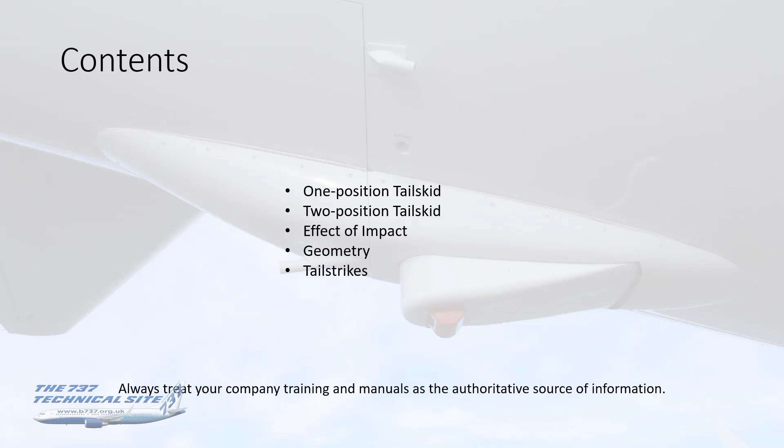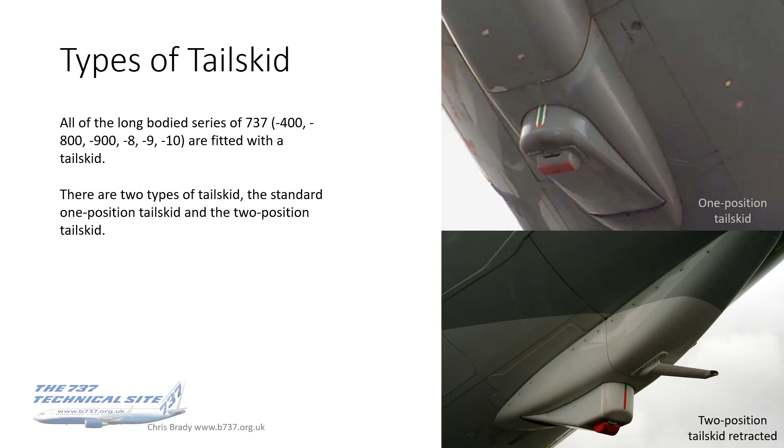Now, when on stand, they both look very similar. It's actually fairly difficult to tell them apart because almost all the time a two position tail skid aircraft is on the ground, the tail skid is actually retracted. The way to identify them is that on the one position tail skid, the skirt is pretty much straight, whereas you can see on the lower photo the skirt has got a distinct angle about halfway through it,

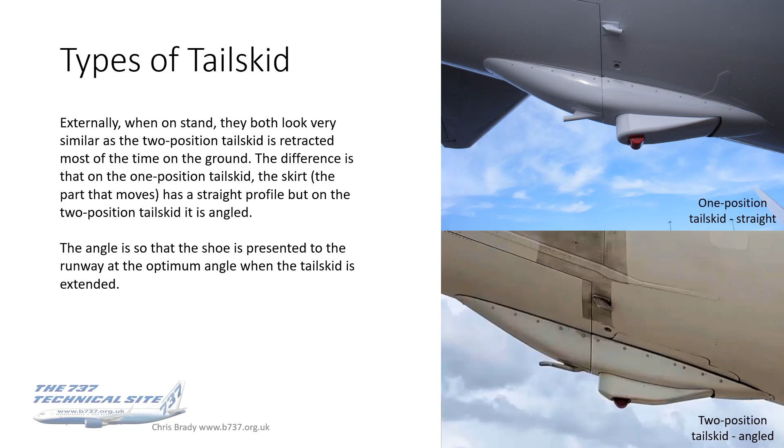and that's so that when the shoe is presented to the runway, it will be presented at the optimum angle when the tail skid is extended. Otherwise, you can see from the geometry it may just hit that angle first rather than the shoe, which is what it needs to do. This will become more apparent later when I show you photos of that two position tail skid in the extended position. But if you're on a walk around wondering which one you've got, that's one of the ways to tell.

So let's have a look at that one position tail skid in a little more detail. So this is standard on the 400, 800, and the old 900, the MAX 8 and the MAX 8 200. And what it does, it protects the fuselage from tail strike damage during over rotation on takeoff. And that's important to remember, that it only protects the aircraft on takeoff.

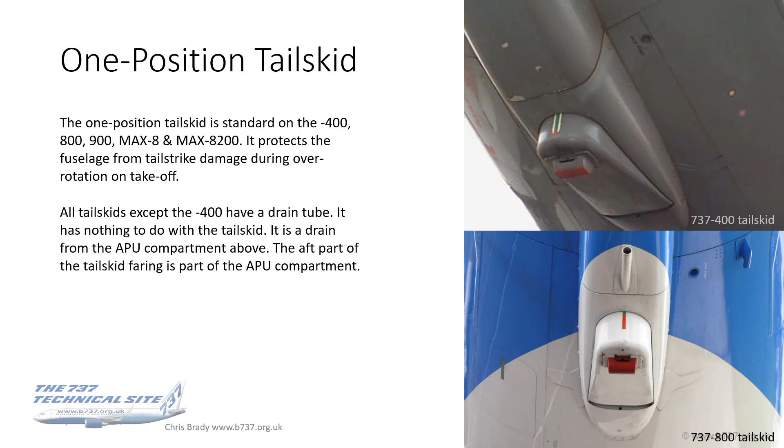All tail skids except the 400 have got a drain tube, which you can see just aft of the skirt there on the lower photo. That drain tube has actually got nothing whatsoever to do with the tail skid. It's a drain tube from the APU compartment above it. The aft part of the tail skid fairing is actually part of the APU compartment. You can see the line there going across sort of halfway on the tail skid, about an inch or so behind the skirt and the decal. That's because the tail skid fairing isn't one piece. It separates because the back half is part of the APU compartment.

And the simple reason why the drain tube is long is just to keep the fluids off the aircraft skin. If it was just a hole or a short tube, then it would make a mess all over the back of the fuselage. But being several inches long, it's hopefully taken away by the airflow. So that's all that is. No great mystery there.

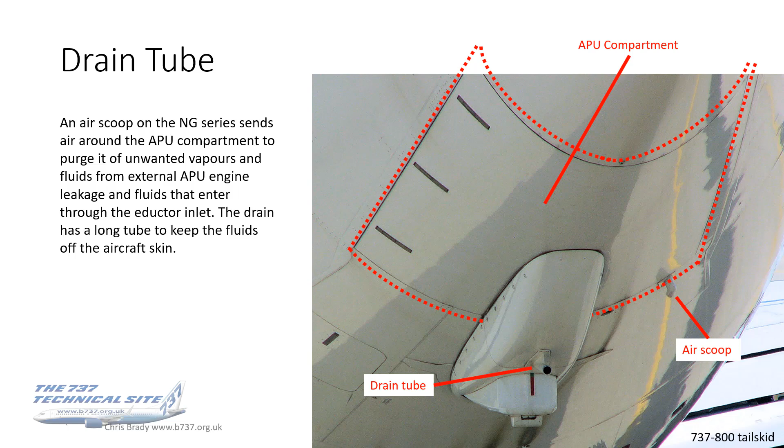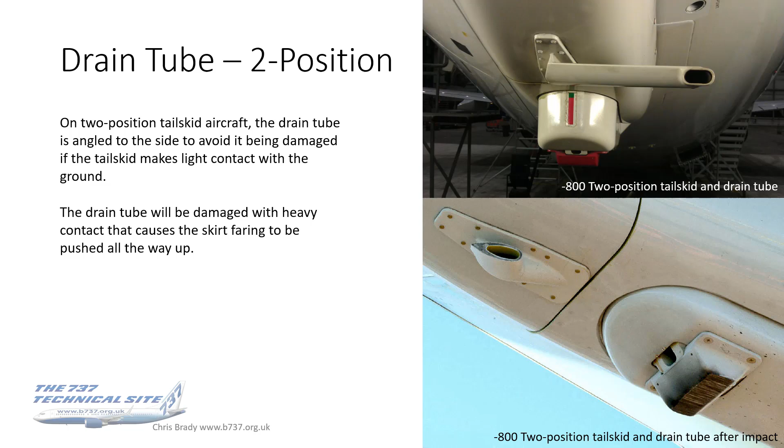You can see on the lower photo that after heavy impact it will be worn away. Well, there you go. The drain tube is kind of designed with that in mind. I wouldn't quite say it was sacrificial, but it's certainly made from a material that will erode on contact with the runway. So that's the drain tube pretty much covered. Oh no, not quite. There we go.

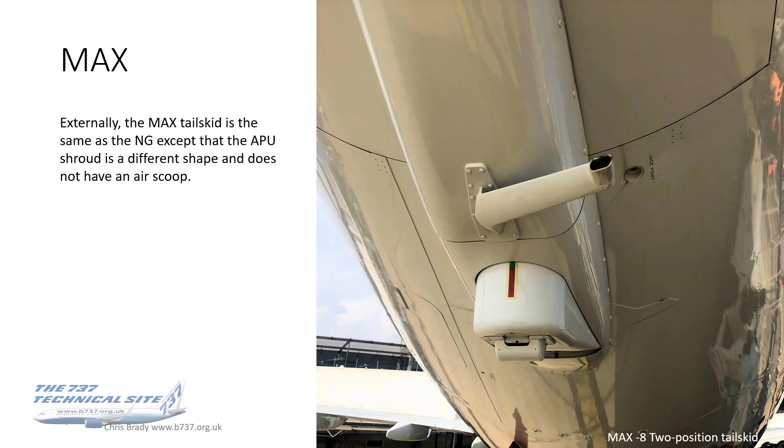On the Max, it's the same as on the NG, with the exception that the APU shroud, because it's a different shape, because of the different tail section on the Max, doesn't actually have an air scoop. It doesn't have an eductor hole, if you recall, on the APU. For more details of that, go see my APU video. But it doesn't have the air scoop, but the drain tube is the same.

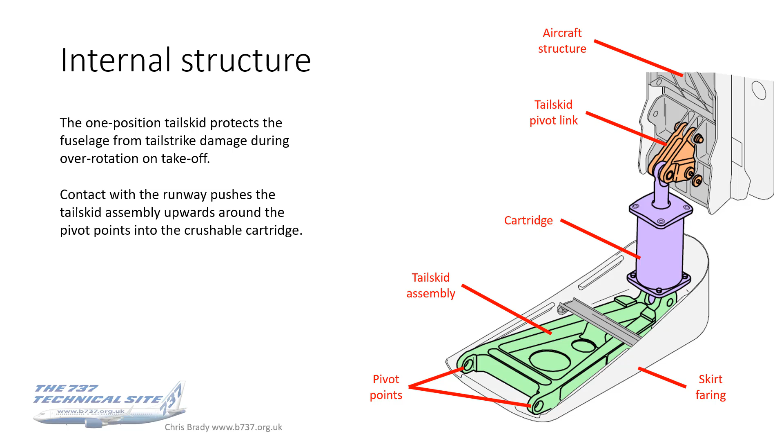And then, if the contact was a little harder, it would push that tail skid assembly upwards around the pivot points, because it's pivoted at the front there, into the crushable cartridge, which is shown there in purple. The cartridge is attached to a pivot link, shown in sort of orange, which is in turn attached to the aircraft structure. So that's what it looks like inside, and we can compare and contrast that with the 2-position tail skid.

So these photos are showing the 2-position tail skid retracted on the top and extended, as you can see, on the bottom. So it doesn't extend very far. It's actually only 5 inches, but it's considered to be enough. So the 2-position tail skid, as you're probably aware if you saw my previous video on the SFP, was brought in for the lower approach speeds of the SFP.

So it came in 2006, and it was considered to be so successful, it's now standard on the 900 ER. In fact, it was one of the factors that made the 900 ER, the Max 9 and the Max 10. It's also, as I said, an SFP option for the 800 and the Max 8.

The main operational difference between the 1-position and 2-position tail skids is that the 2-position tail skid protects the fuselage from tail strike damage both during takeoff and landing. That's the key to it. This will protect the aircraft to an extent for landing, which the old 1-position tail skid never did.

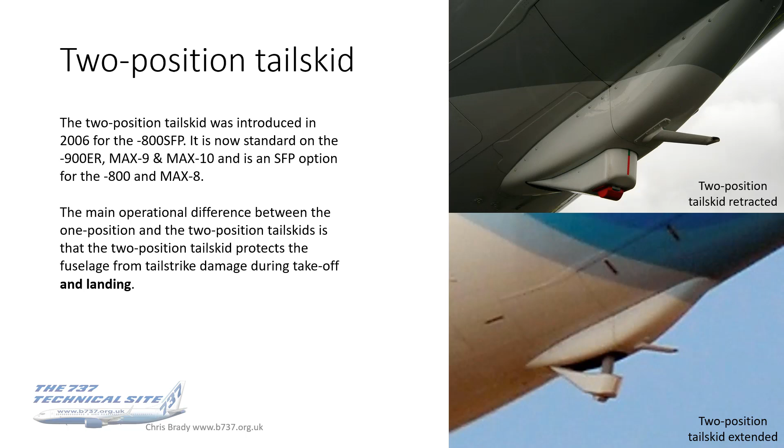So extension criteria: it will extend 5 inches, or 12.7 centimeters in metric. It extends just before landing. It actually comes down when the gear comes down. So this allows greater angles of attack to be safely flown. That enables low VREFs to be scheduled, and hence the landing distance reduced.

So there's no button or switch or anything in the flight deck other than the gear lever. That's what triggers it. So it will extend when the gear is extended in flight, i.e. for landing only. So this does not extend for takeoff. Okay, it only extends for landing. It will retract when the aircraft is on the ground for more than 5 seconds, which is why you never see it extended on stand.

Or if the landing gear lever is not down. So as it comes down, when the gear comes down, what they really mean by this is if you've gone around. So for the go-around case, the tail skid retracts.

Now you may think there's a bit of unnecessary over-engineering with having that. My theory for why this happens is because there would be a drag penalty with this, particularly perhaps in the engine-out scenario, and that would need to be recertified and what have you, and new graphs drawn up. Whereas I guess Boeing thought, well, if we can make it extend, we can make it retract again. Let's have it retracted for go-arounds. Which, as far as we're concerned in the front, we like that. Anything which gives us better performance, we're all in favour of.

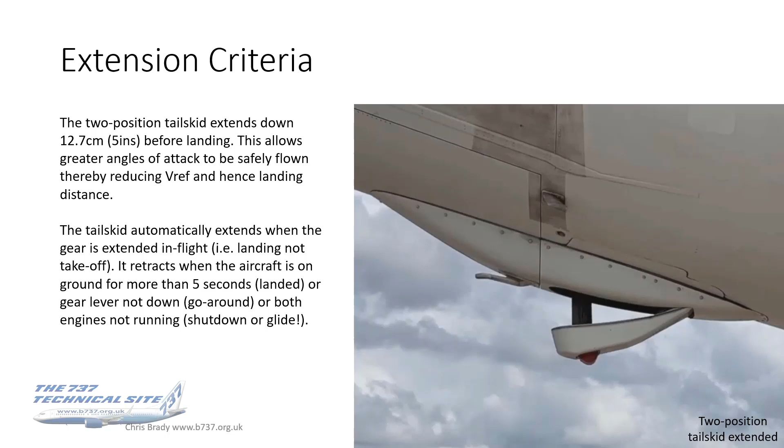If you're in the flight deck and you missed it on the walk around, whether you've got a 1 or a 2 position tail skid, the IDENT page will help you out here, and it's shown as a .2 suffix on the model field. That's for the 800 and the Max 8. The .2 suffix is not declared on the 900ER, the Max 9 and the Max 10, because it is standard on those 3 models. So only on the optional models, which is the 800 and the Max 8, will it be declared as a .2.

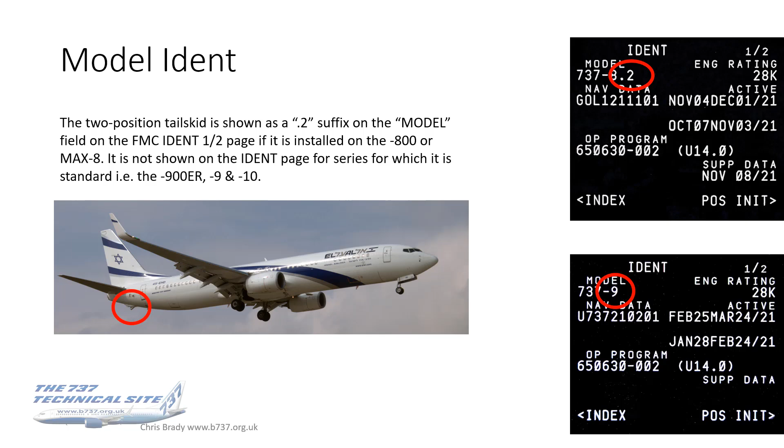The 2-position tail skid, certainly on the NG, is controlled by the supplemental PSEU, or the SPSEU. Those aircraft have got an SPSEU light on the aft overhead panel, which you can see in the upper photo there. On the Max, they don't have an SPSEU. It's like a sort of combined PSEU. Again, for more details, see the PSEU video. But you've only got a maintenance light on the aft overhead.

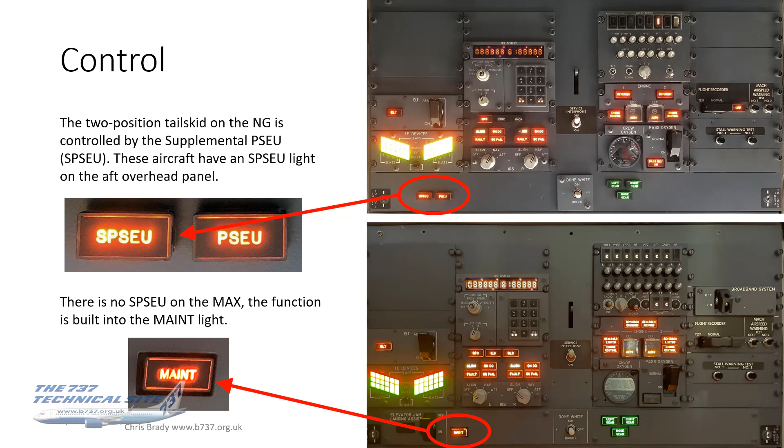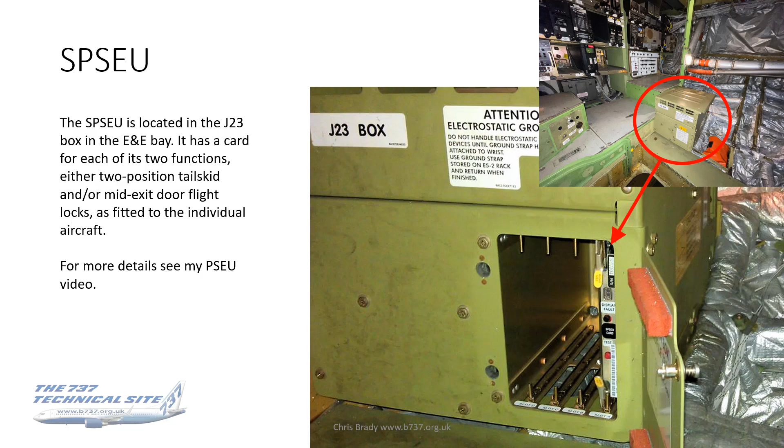This again, for those that didn't catch the PSEU video, is where the SPSEU is located. It's what's known as the J23 box, so junction box number 23. It's in the E&E bay. You can see it there, circled in the inset photo, and an enlargement of it here with the hatch open, showing space actually for 4 cards, but only 2 are used to my knowledge. One for the mid-exit door control, and one for the 2-position tail skid. So that's where the control for that lives.

You will find this switch on the side of the J23 box for all 2-position tail skid aircraft, and this is what engineers can use to extend or retract the tail skid on the ground for servicing or inspections or maintenance, or whatever they might require to do that for. Not something we as flight crew should ever operate, but, as with all my videos, it's good background knowledge to know of its existence. So there you go.

If you are tempted to do it, don't forget you'll need hydraulics, and make sure that the area around the tail is clear. It says clear of personnel. I don't think anyone would be tall enough, but maybe if you've got a ground servicing vehicle at the back, you know, a honey cart or something, then you wouldn't want to cause it to be damaged there.

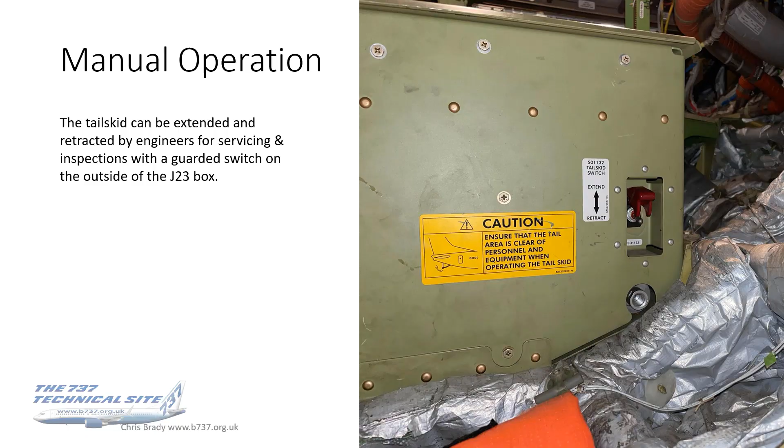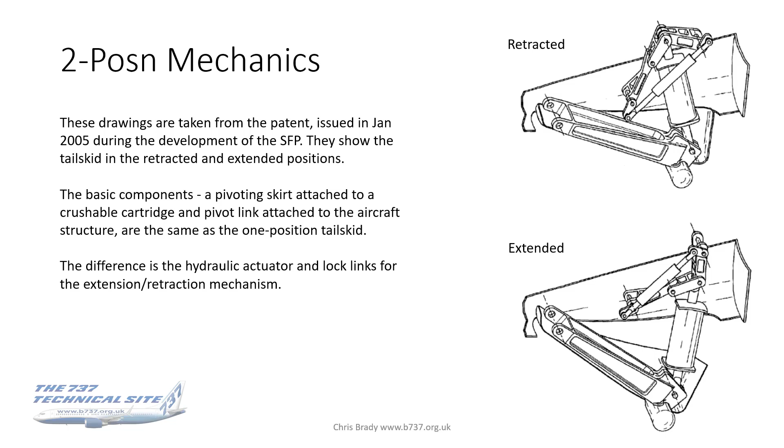This is a view looking inside the tail skid from above. Now this is the two-position tail skid in the retracted position, and what you're looking at really are the over center lock links that lock the tail skid in either the extended or the retracted position. These over center lock links are really the same as in the landing gear. Again, cast your minds back to the landing gear video for an explanation of those.

The SPSEU tail skid card controls a relay, so there's an electrical signal sent to power a solenoid-operated hydraulic system A control valve in that tail skid actuator. So it's electrically controlled, hydraulically operated. The actuator acts on the forward lock link, breaking the over center lock, causing the cartridge and tail skid to extend or retract. That is how that works.

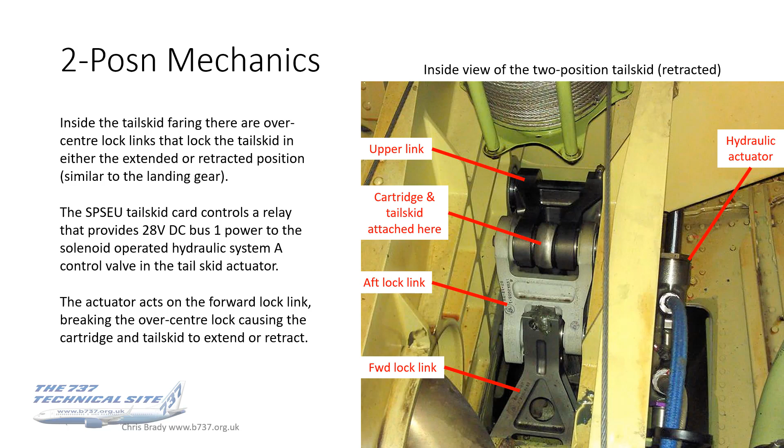So let's look at the effects of impacts on the tail skid. I've already kind of mentioned the shoe. Now this really is what's used, or should be the only part used, during a gentle impact with the runway. With gentle contact, it will only wear the shoe down by friction with the runway. The actual skirt fairing won't move with gentle impact. It'll stay in the same position.

So if you've had one of those and you go back and look at the tail skid after you got on stand, you may see that the warning placard is still green and indeed unchanged from when you picked up the aircraft that morning. The only way you will be able to tell that you had a light tail strike, if I can call it that, is by looking at the condition of the shoe.

And it's for that reason that many operators paint the shoe red, so that any wear will show up more easily, because remember that shoe is made of metal. So once you scuff that along the runway, you will expose the bare metal, which will show a colour contrast against the red. So that's what you should be looking for then.

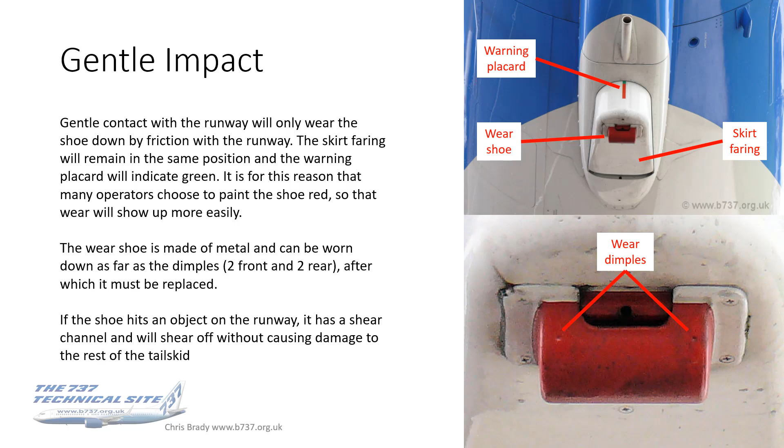Now, if whilst the shoe is in contact with the runway it hits an object, and by that we would hope we're talking about centerline lights or something, that impact may cause the shoe to break off. Again, there's no big drama or crisis with that, because it's actually designed with that in mind. There is a shear channel there, and the shoe can shear off without causing any secondary damage to the rest of the tail skid. So that's gentle impact. It should all be confined to the shoe.

Hard impact, on the other hand: the impact will actually occur at the shoe, but it will start to push the whole skirt up into the tail skid fairing. Remember, this skirt is hinged at the front, so the back end, which is where the shoe is, will push up into the fairing. Now inside you've got a cartridge, which you can see in that bottom photograph, with a before and after. A new cartridge is on the left, and a post tail strike cartridge is on the right.

A lot of thought has gone into the design of these to make them able to absorb the force of a tail strike without damaging the aircraft. So they've got to try and take the right amount of force and still push back on the aircraft against the runway, to prevent any further damage being done.

So this is made of aluminium, which, as we know, is a relatively soft metal. I mean, if it was made of too hard a metal, it wouldn't crush. If it was made of, I don't know, cardboard, it would put up no resistance at all. So it's made of aluminium, or aluminium honeycomb.

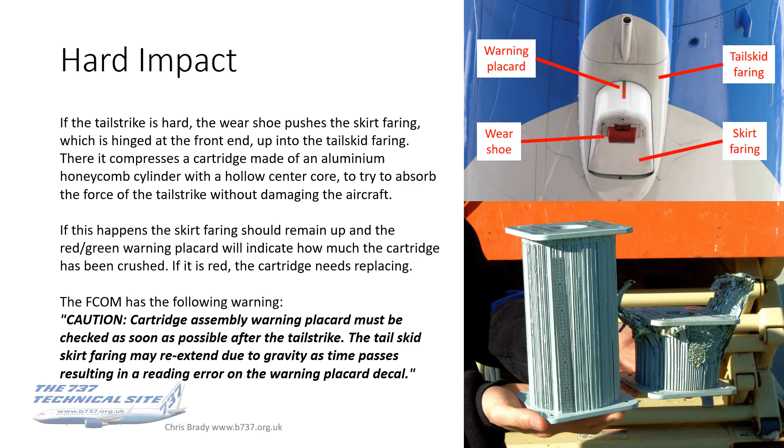If it's really bad and you have a very hard impact, then what will happen here is that the impact of this will actually force the whole cartridge up so rapidly. It may or may not crush, or it may go beyond where it goes for crush, but there is a fuse pin designed into that pivot link.

Fuse pins, as we know, are designed to shear at a certain threshold, and what will happen is that the skirt and cartridge assembly will then push up as one into the fuselage without pulling on that pivot link, which could have done secondary damage to the aircraft structure. So that's your third level of protection, if you like.

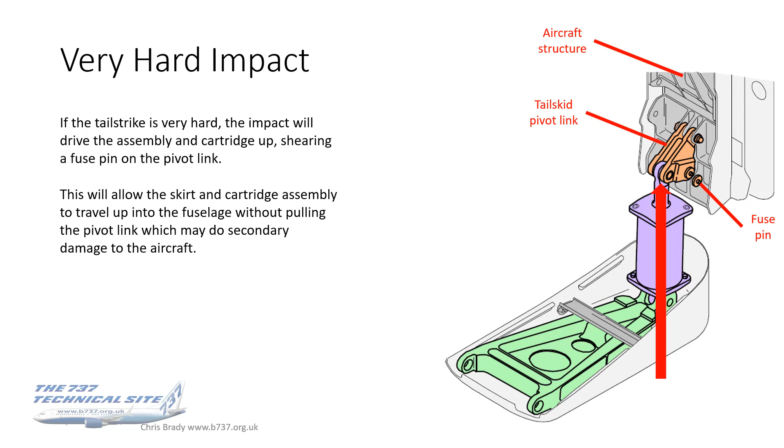So light impacts, it's all taken up by the shoe. Hard impacts, it should be absorbed by the cartridge, and with very hard impacts, you'll break the fuse pin, and then we're into serious structural inspections after that. As was undoubtedly the case here.

Now, these photos are actually from an accident report to a 737-800, registration there. I've put that on not to name and shame the aircraft or operator, but just so you can Google this and find the report yourselves. If you just put that into a search engine, you will find the report and this and several of the photos beyond. But it's quite useful.

I know a lot of engineers watch these videos as well. We've got station numbers listed there, and certainly for the aircrew, it shows in the inset diagram at the top where your damage is likely to occur. And it's a long way forward of the tail skid.

In such extreme cases as events like these, the tail skid won't absorb all the damage. In fact, on some, as I'll come on to tell you when I talk about the geometry of it, the tail skid might not actually even be touched because the impact happens so far forward. But with events like these, clearly, as you can see, the skin of the aircraft can be punctured, or certainly worn so thin that it needs to be reskinned.

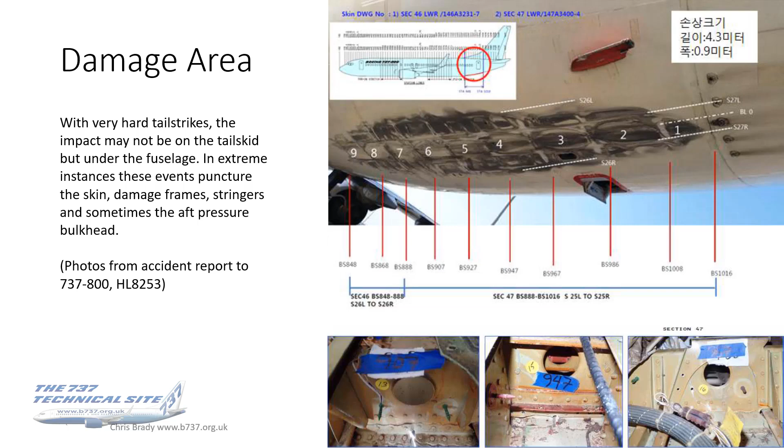Oh, here we are. So the QRH procedure. It makes no distinction between a soft or a very hard tail strike. If you suspect or have confirmed that you've had any form of tail strike whatsoever, then this is the procedure that you must follow. So it assumes the worst case scenario, which is that pressurized flight with significant damage to the skin can lead to a structural failure, and it therefore directs you to manually depressurize the aircraft and land as soon as possible.

So pressurization mode selected to manual, and get the outflow valve out to full open so that the aircraft can't pressurize, and land at nearest suitable airport. Obviously, you'd hope that you detected this quite soon after takeoff, but you know that. Again, I'll show you an example in a moment where a crew were not aware that they had a tail strike, and it's not that uncommon.

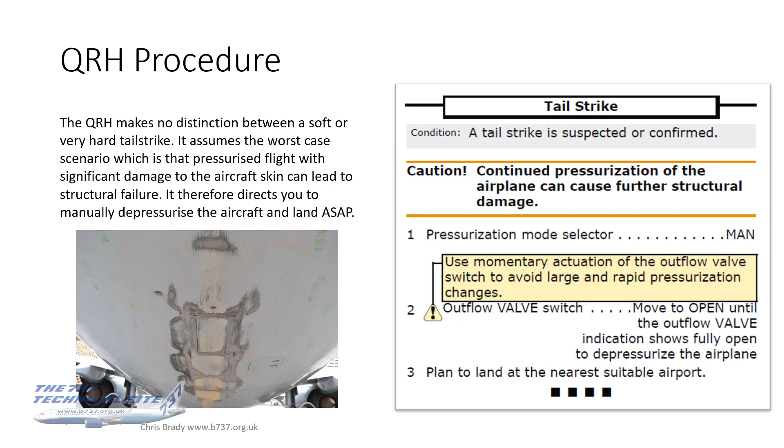In which case it may be the airport which have observed it. Then time's passed while they've sent out an inspection vehicle to inspect the runway, and then called on to you, by which time you could be 10, 15, 20,000 feet and already starting to pressurize. So you may need to do this to actually depressurize rather than stop pressurizing.

That's the key difference here. You don't get that on takeoff. The struts are extended, from when you walk around, when the aircraft's boarding, taxiing out. You take off, the struts extend. On landing, they compress. And depending upon the body angle and the amount of strut compression, because there are several variables in here, your contact point could well be the fuselage.

Now, the two-position tail skid aims to address that. So for takeoff, there's actually no change. The two-position tail skid remains retracted. No additional protection was deemed necessary by Boeing for the SFPs. So for takeoff, the contact will continue to occur at the tail skid.

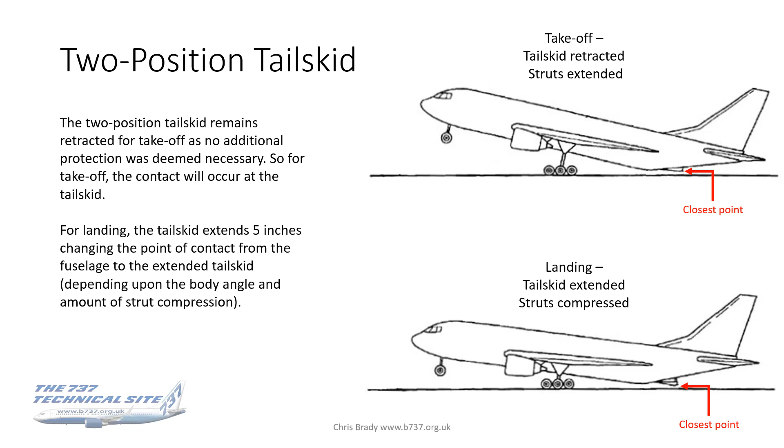And just to put some numbers on this, and again, this is just throwing back a little bit to the SFP presentation, the VREF is reduced by around about 7 to 8 knots at flap 30 and 4 knots at flap 40 compared to the similar weight approach with a one-position tail skid aircraft. So it does give significant advantages in performance. You just have to be a little bit more careful about tail contact.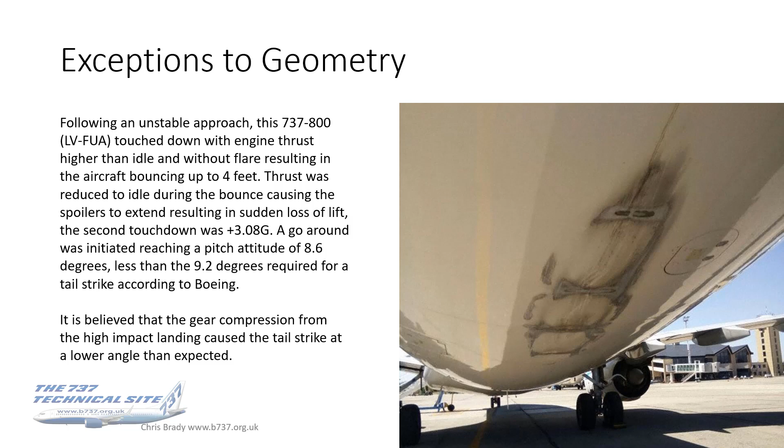Your approach speed, your touchdown speed will have an effect on the tail skid, on the contact angle. Again, this graph from the FCTM shows the variation of touchdown body attitude with delta V from VREF. If you're not familiar with this graph, then do take some time to have a look at it, particularly if you're flying the long-bodied aircraft. It takes a little bit of getting your head around, but you've got VREF down at the bottom, and then as you go up, so typical contact pitch attitude around about 6 degrees at VREF. The solid lines are flap 30, the dotted lines are flap 40. And this is for an SFP 800, so 2-position tail skid 800.

So at VREF, you're safe. You're a good three or so degrees away from contact. At VREF -5, you're getting close, and at VREF -10, you are likely to have a tail strike. So as I've written on the side there, allowing the speed to drop anywhere below VREF, particularly with flap 30, makes tail skid contact possible as the struts compress. So watch your speed on touchdown.

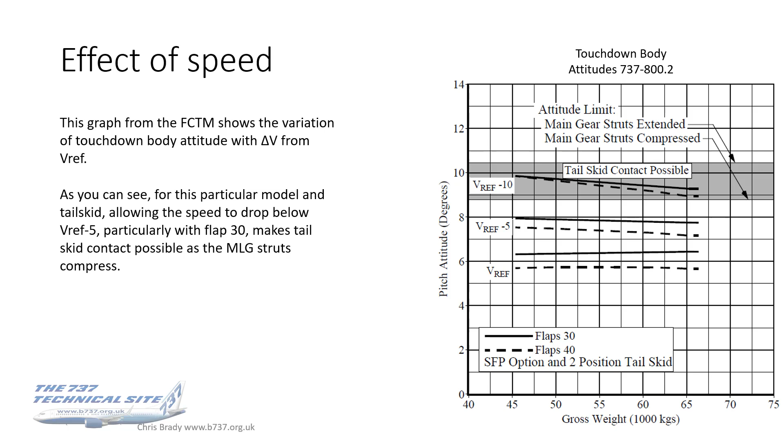Next variable, this is for the takeoff case, obviously, so it's the effect of takeoff flap. Again, I've compiled this from all the FCTMs from the originals right up to the Max.

And all I've included here is for takeoffs of flaps 1 and 5. The tables you have in the FCTM go right the way up to 25, but it was clearly going to be way too busy to show it on this one slide. And really, the at-risk area is flap 1 and 5, which is why I've shown those.

So 1 and 5 is where you've got less tail clearance than the higher flap settings, because lift-off attitudes are higher. And the FCTM actually says, consider using a larger flap setting for takeoffs at light gross weights. In other words, where you can. They also say that aft fuselage contact is unlikely in the 200, 500, 600, and 700. If you look at those numbers, you could probably add a couple more to that list as well.

But again, you can see that on the 800 and 900, which are the most common models, you've got a tail strike attitude there of 11 degrees on the 800 and 10 degrees on the 900 and the MAX 9. So it could be worth going for higher flap settings just to improve your tail clearance, because you're down to 13 inches of tail clearance on the long bodies at flap 1, and 13 inches isn't a lot.

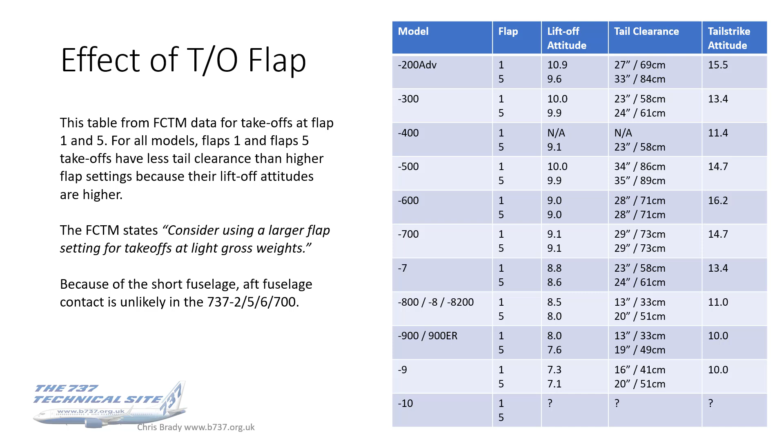So this video was taken, I think, earlier this year or late last year. It shows a BBJ3 or a 900ER taking off from a wet runway at Glasgow. The aircraft unsticks normally, but then pitches up further, making contact with the tail skid after the aircraft has got airborne. And thanks to Daniel Sander for use of that video.

Okay, so let's have a look at some more tail strike case studies and the factors surrounding them. This photo here is from a 737-800 tail strike at Birmingham in 2018, following a takeoff contact, and it shows the extent that the damage is confined to the tail skid, drain tube and probably the cartridge. So there was no fuselage contact, as you would expect on a takeoff case, because the oleos are not compressed. But there's a significant amount of damage there to the tail skid.

That looks like it's been probably full cartridge compression on that one, possibly even the shear pin gone as well. But interestingly, in that event, given the amount of damage, you may find this surprising, but the crew were not aware of the tail strike until air traffic asked them. Because the incident was spotted by a member of ground ops, I think, at the airport. They called it through to air traffic, and air traffic called the crew and said, are you aware?

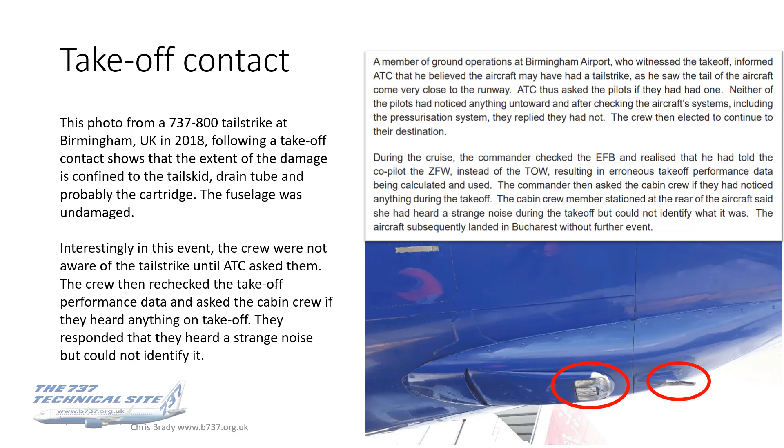Anyway, again, that accident report's available to read from the AAIB website. My takeaway point is that if you have a tail strike, you may not know you've had a tail strike, even a fairly hard one. This event was due to a mistrimmed stabilizer, which was as a result of erroneous weight or CG data.

So this happened because of a loading error, and what happened in this case was that as the crew set takeoff thrust at the start of the takeoff roll, the aircraft just tipped up on its tail, and this apparently happened at about 5 knots according to the report. It was literally seconds after TOGA was pressed, and before the N1s had even got up to takeoff thrust. The aircraft just sat back on its tail and did that damage there.

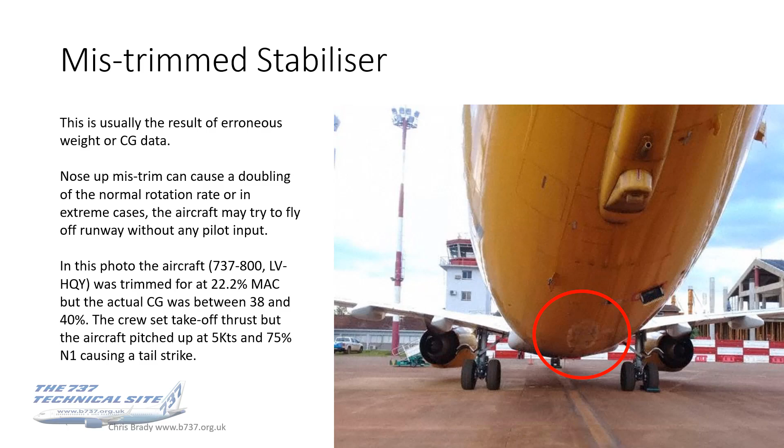Okay, now this clip is of a 737-900ER, and you can see that it bounces on the first landing and then has a tail strike on the second touchdown before going around. And this is actually a fairly common tail strike scenario.

Now, I want to state that my intention in showing this is not to criticize the crew at all. I don't know what went on in that flight deck. I wasn't there. I don't have the data. I'm not saying anything against the crew. All I want to do here is just pass on some technical observations to people, which may help an understanding of the technical aspects surrounding such events.

So, points of interest that caught my eye when I watched this video. First of all, it was a 900ER. So we've already seen from the tables that are put together there that the ground contact angle of 10 degrees, or even less with landing gear compression, is the lowest of all the 737 models. So really, this may not have happened on another model of 737, but on this one, you know, if it's ever going to happen, this is where it was happening.

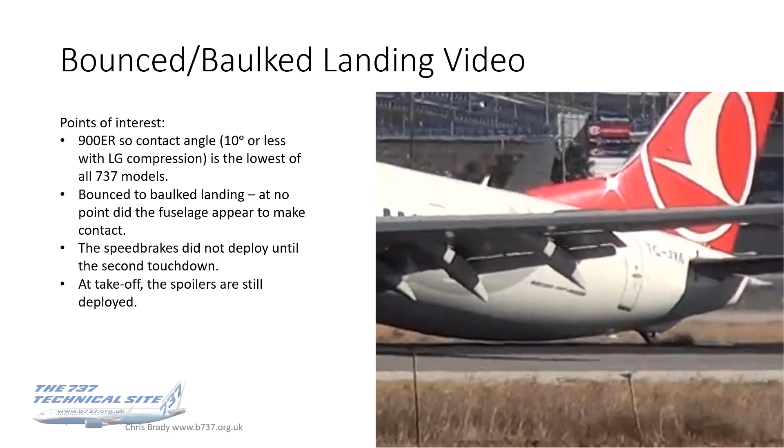First question is, why didn't the speed brakes deploy on the first touchdown? Because I'm sure if they had, the bounce may not have occurred. I mean, I don't know, but it would have been less likely to occur.

So if we go to the FCOM and just run through the criteria for speed brake deployment, what you need is for all of the following to occur. Speed brake to be armed, on the NG the rad alt to be less than 10 feet, the landing gear strut compressed, and just to specify, the right main landing gear brings the ground spoilers, any main landing gear brings the flight spoilers. Both thrust levers to be at idle, and the main landing gear wheel spin up, in other words, to be above 60 knots.

Now, again, I'm not privy to any information other than this video, but it would appear to me that the most likely scenario here was that the thrust levers were not at idle, because all the other criteria were probably met. The only possible one that may not have been met might have been the landing gear strut, but I doubt it, because on the NG we've got 2 sensors on each wheel, unlike the classics where it was only on the right. So the most likely scenario is that the thrust lever was not at idle, and why that happened I don't know. I'm not going to speculate.

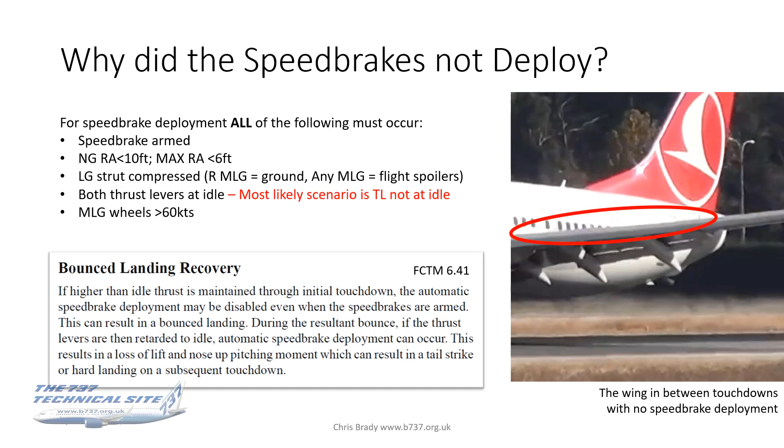Now, question is, why did the speed brakes not subsequently retract? Because I've stepped through this video frame by frame, and as the aircraft took off for the second time, for the baulked landing, the speed brakes are still extended. It's a little difficult to tell exactly when, but the FCOM tells us that the speed brakes will automatically retract when either thrust lever is advanced. Now, it wouldn't have got airborne if the thrust levers hadn't been advanced, so they absolutely were.

The FCOM says after an RTO or landing, if either thrust lever is advanced, the speed brake lever automatically moves to the down detent and all the spoiler panels retract. Spoiler panels may also be retracted manually by moving the speed brake lever to the down detent. Well, it probably happened automatically.

Now, as I say, the angle of the video hides the exact moment where the speed brakes are retracted, which is a little bit of a shame. But in all probability, having looked at this many times, the speed brakes were being commanded down by the thrust lever position. They must have been, because obviously takeoff thrust was applied to go around.

But I think that the point here is that the response is fast, but not immediate. It can't be immediate. There's a mechanical process to go through. So it's probable that they had retracted by the time that the aircraft was airborne, but by then the tail strike had already occurred. So that's my take on that.

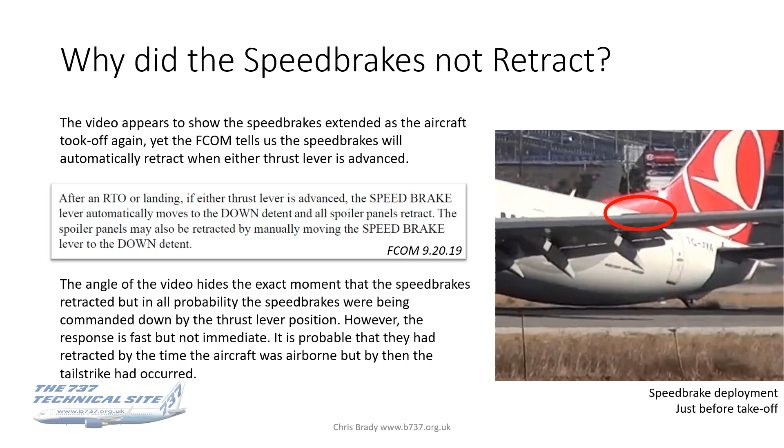Looking again at another event, this one's on a 737-800 with a single position tail skid. This follows a baulked landing, so a very similar situation to the one we just saw the video of. It shows how far from the tail skid the fuselage contact can occur if the tail strikes on landing. Again, this is the single position tail skid aircraft.

In addition to the fuselage damage, you can see the tail skid's been pushed up beyond the decal. That suggests that the tail skid shear pin has been broken. If you can't even read the decal, then you know it's been quite a significant tail strike.

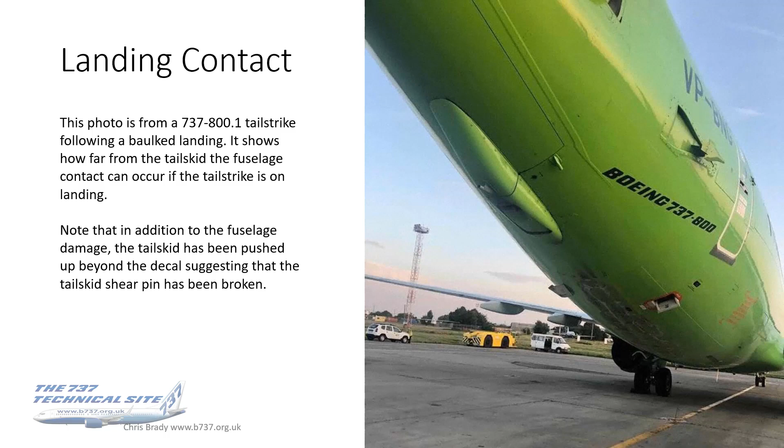Okay, and the last case I'll look at is holding off the runway in the flare. Now, we've got a video here of again a 737-900ER, so the most vulnerable of the 737 models. It appears to land in a normal attitude, but then it rotates upwards. It sort of pitches up after touchdown with possible fuselage contact.

Now, that rotation could be aircrew input. Again, I don't know. I wasn't there. I'm absolutely not here to judge. I'm just here to add some technical insight if possible. But

the other reason could very well be that the deployment of the speed brakes will cause the aircraft to pitch up as the lift is destroyed behind the CG, and this is actually a design feature of the aircraft. It's a legal requirement of the design of the speed brakes that they must not cause a pitch down when they're deployed, which would exacerbate an overspeed condition. So the aircraft will pitch up, and the previous extract that we read from the FCOM also echoes that.

So the risk is that if you delay lowering the nose onto the runway, as the speed brakes deploy, it will give you an uncommanded pitch up, if you like, which could cause tail contact.

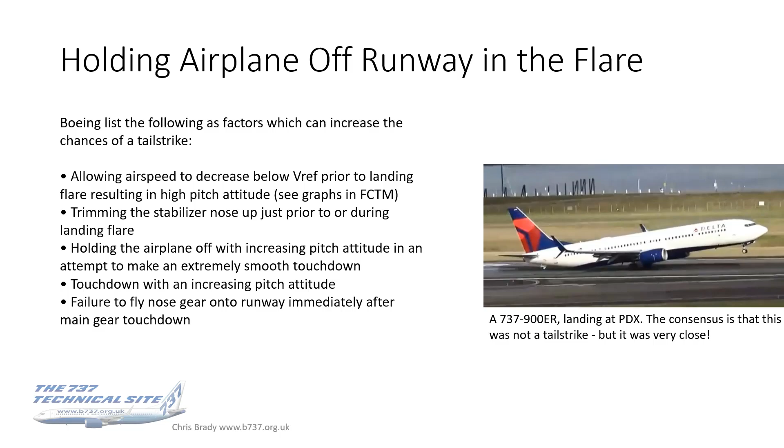Fourth, touching down with an increasing pitch attitude. Again, go for the touchdown attitude and hold it. And finally, failure to fly the nose gear onto the runway immediately after main gear touchdown, because, as discussed, you could leave yourself open to the pitch up effect of the speed brake deployment. So there it is. That's the tail skid, and a little bit of insight, I hope, on tail strikes.